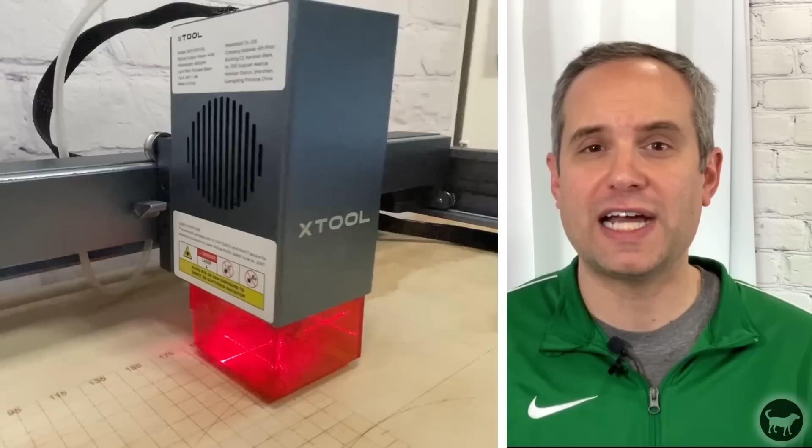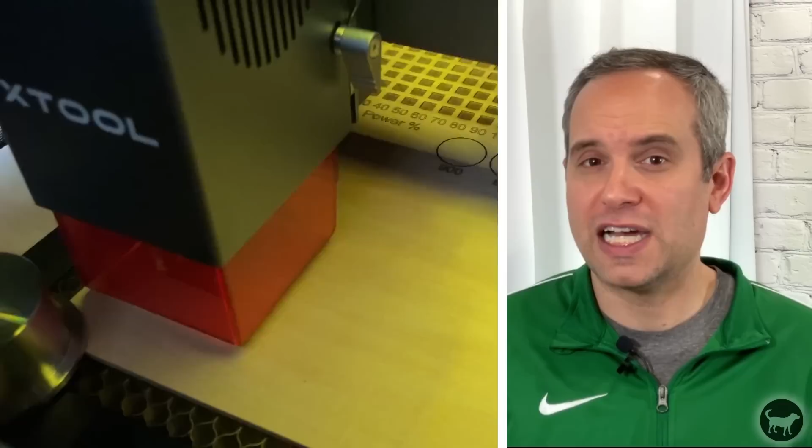Hello, my name is Ryan from Buster Beagle 3D, and today I'll be talking about the XTool 40W diode laser module. It is the newest laser by XTool that achieves the wattage of some of the entry-level CO2 machines. So is this diode laser the CO2 killer? Does it mean it is twice, 4 times, even 8 times better than the diode laser you may already have? Well, let's find out.

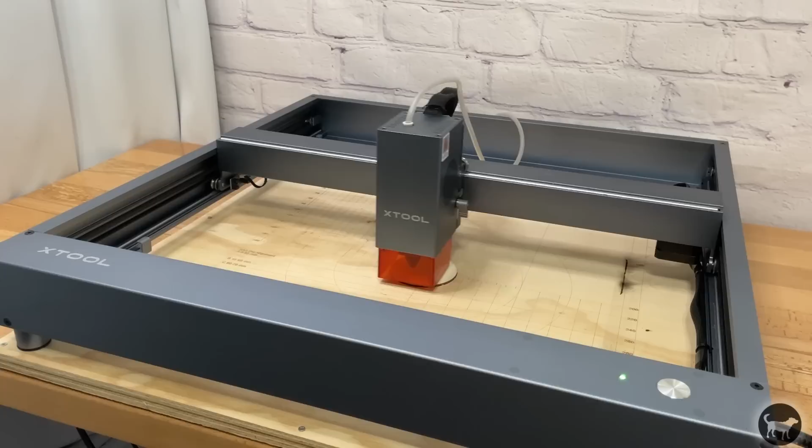So first, this 40-watt laser comes as a kit for installing on the current D1 Pro machines. If you already have a D1 Pro in any of the wattages 5, 10, 20 watt, you can use this kit to upgrade. This kit is only listed as compatible with the Pro version and not the original D1 machine. However, if you really wanted to, I'm not really 100% sure why you couldn't install this on the original D1 frame. The frames of the D1 and the D1 Pro seem to be identical,

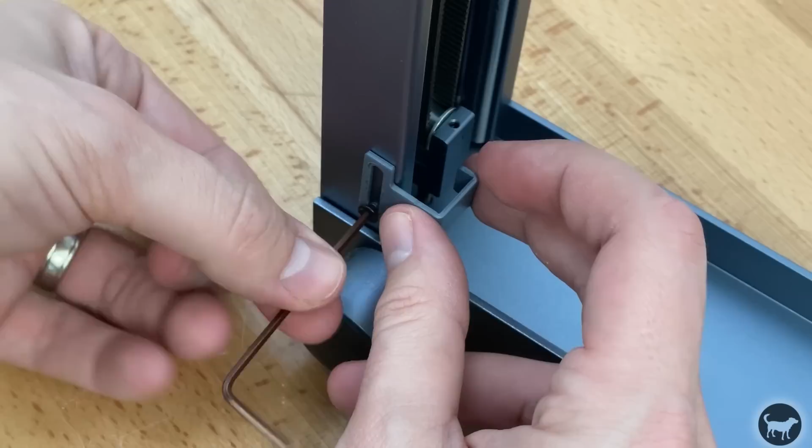minus the holes for installing the limit switch tabs. This kit comes with a complete gantry, new control board, a power adapter, and even new tabs for the limit switches that need to be installed, so I don't really see any reason why you couldn't technically run this laser without the limit switches, or figure out a way to install those yourself. One thing that I know would not work is that you would not be able to use your current original D1 laser module anymore, since the wire connection and mounting plate for the gantry is different. Again, this 40-watt upgrade is listed as only compatible with the D1 Pro, but I just thought I'd give you my observation.

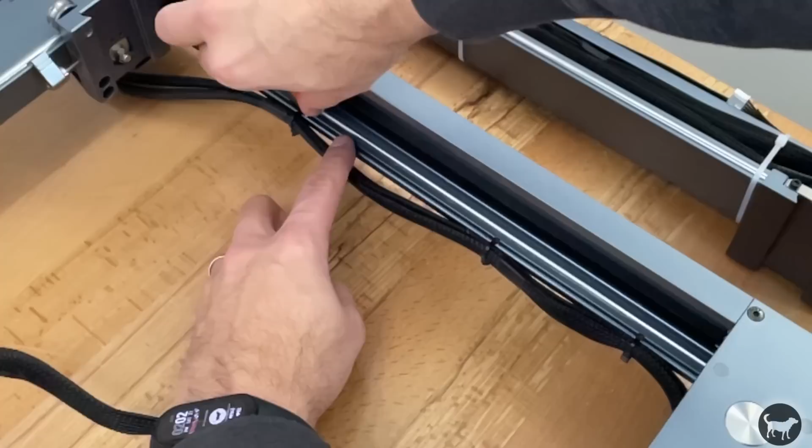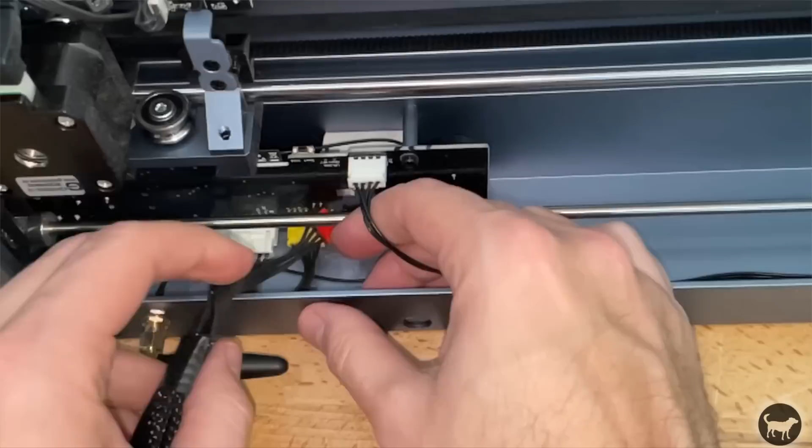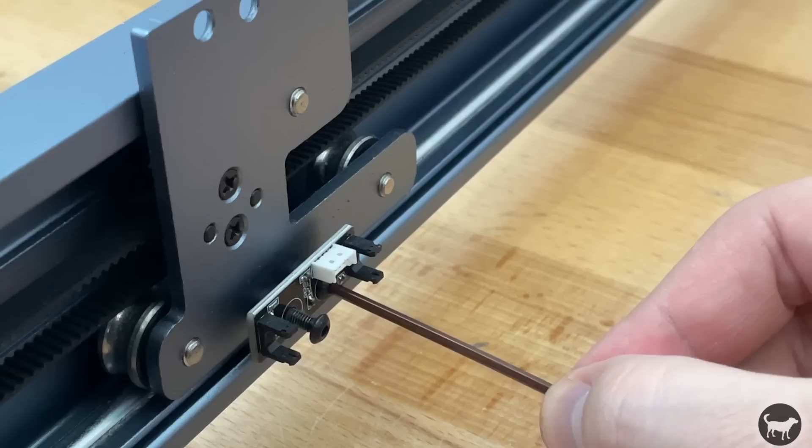So to install this kit, you need of course to remove your current module from your machine. The kit also comes with some nice wire clippers to cut off the current zip ties holding on the wire looms. You then unplug the wires from the control board and also unplug the wire from the gantry to the Y-axis limit sensor. You then remove the 5 screws holding on the X-axis gantry and then remove it. You then remove the Y-axis limit sensor and replace it with the one in the kit, which is slightly different and seems to be more robust than the original. You will also remove the tabs of the Y-axis that read the limit sensor and replace those as well with the tabs in the kit.

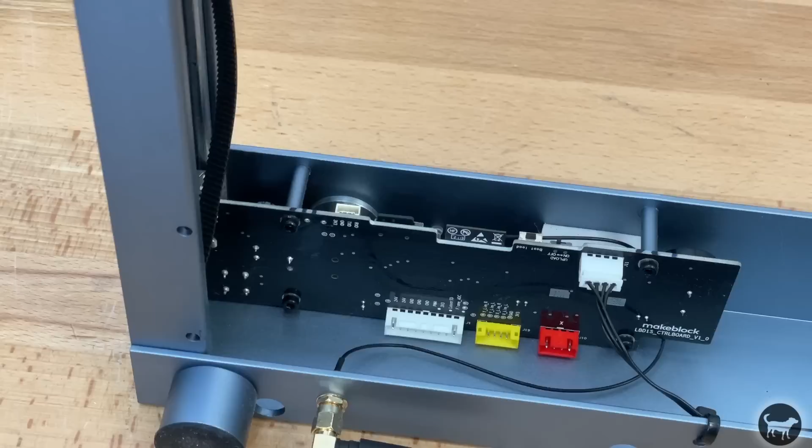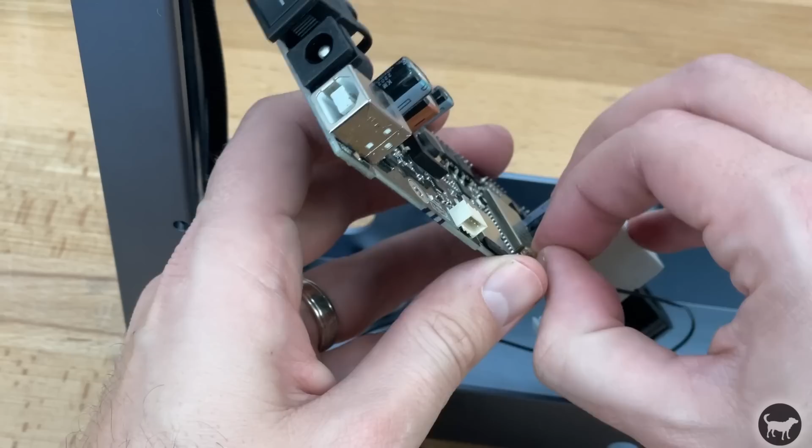You then remove the coupler that controls the Y-axis belt so you have access to the control board. You then remove the power connector and the 4 bolts connecting the board to the frame. Carefully remove the control board to expose the Wi-Fi connection that needs to be disconnected on the other side before the board can be removed. You then install the new control board the opposite way. Connect the Wi-Fi and screw the new board back in, installing the power connector.

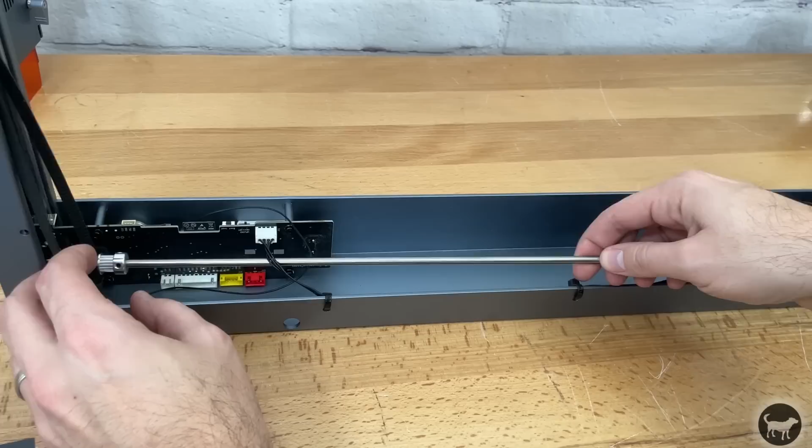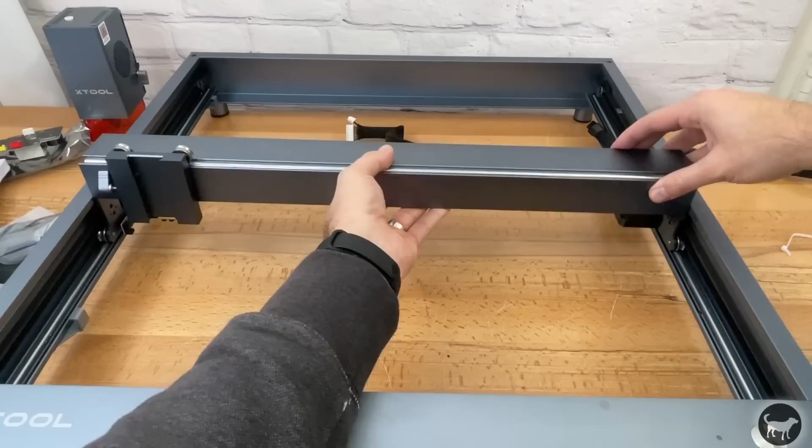You then reinstall the shaft and the coupler, making sure to slide the 2 gantry mounts to the front of the machine frame to make sure the X-axis will be square. If you needed to loosen up the belts to remove the shaft, make sure to readjust the tightness of the belts here before you tighten the coupler to make sure everything is square. Install the new gantry using 5 screws that you removed from before. The kit also comes with all of the hardware you would need to do this, but I just used the hardware that I took off. Be sure not to over-tighten the middle screw, as it's tightening your X-axis belt and you don't want it to be too tight or damage the axis.

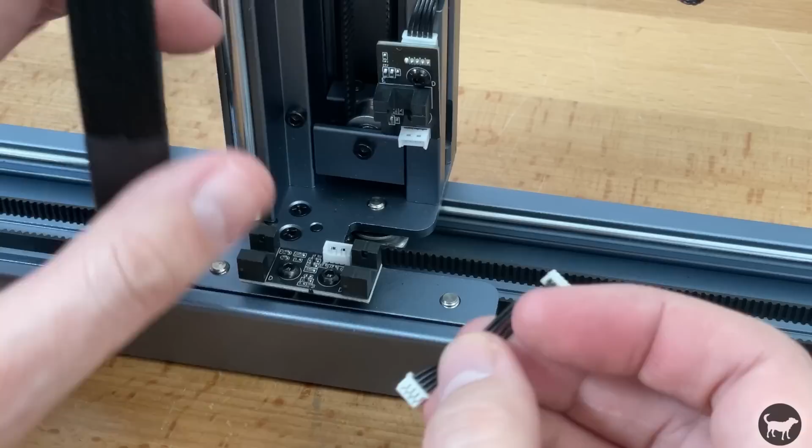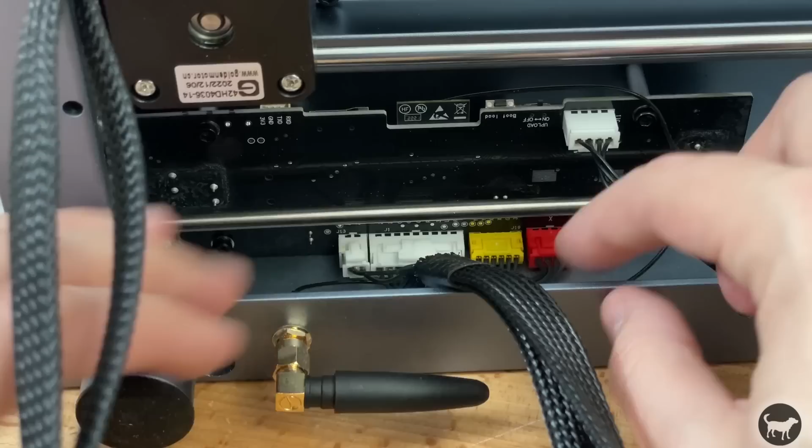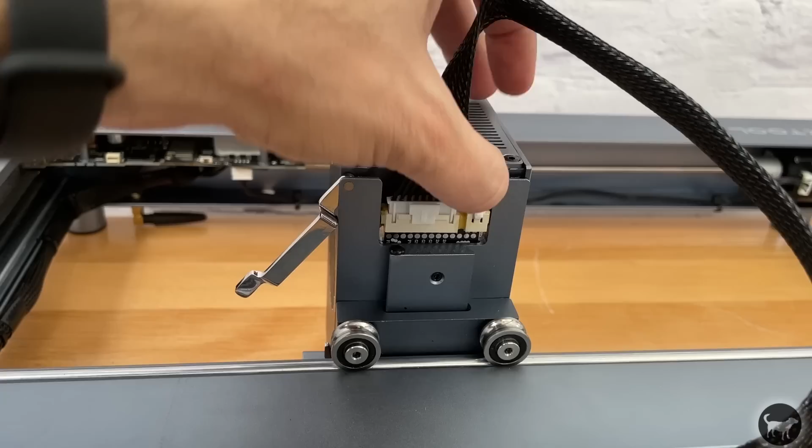Plug in the X-axis motor and the wire you had for the limit sensor off of the original machine. Then zip tie the wire loom to the frame and plug in the wires based on the colors. You can now install the laser module on the frame, flip up that metal tab that will hold the wires in place, and plug in the new wires. You can see it has the same connection as the Pro laser with an added connector, which I assume is for the additional cooling fan in the module. Flip the metal tab down and you are now ready to use your laser.

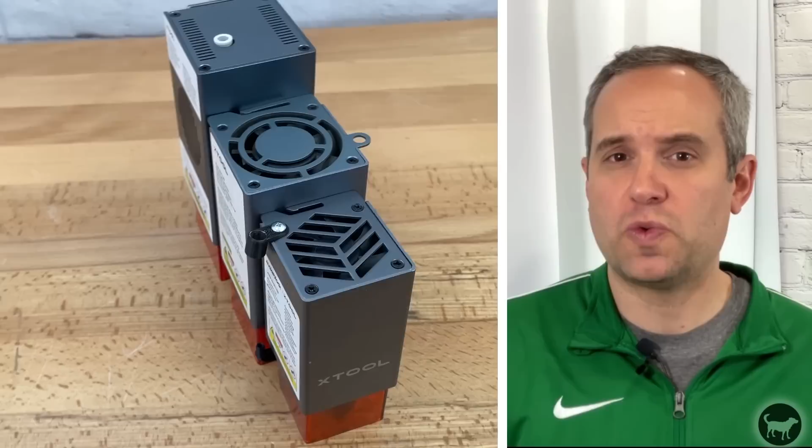So as you can see here, this module is quite a bit bigger than the 10 and 20 watt that you can see next to it. The 10 watt is 13 ounces or 362 grams. The 20 watt is 1 pound 10 ounces or 742 grams. And the new 40 watt is 1 pound 15 ounces or 892 grams. This extra weight is what makes the thicker gantry needed.

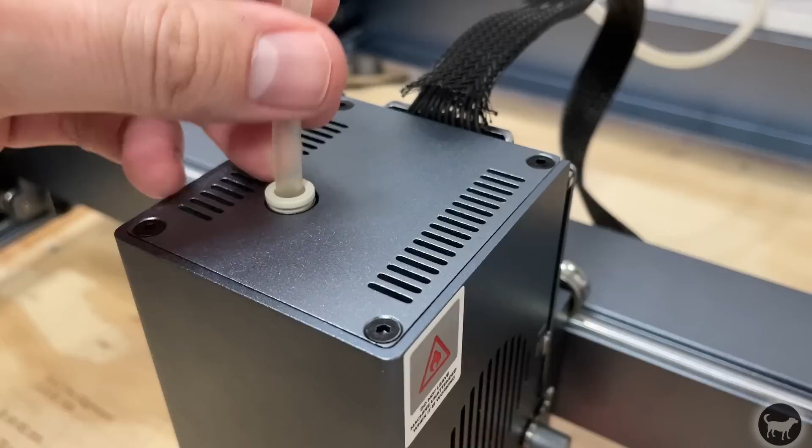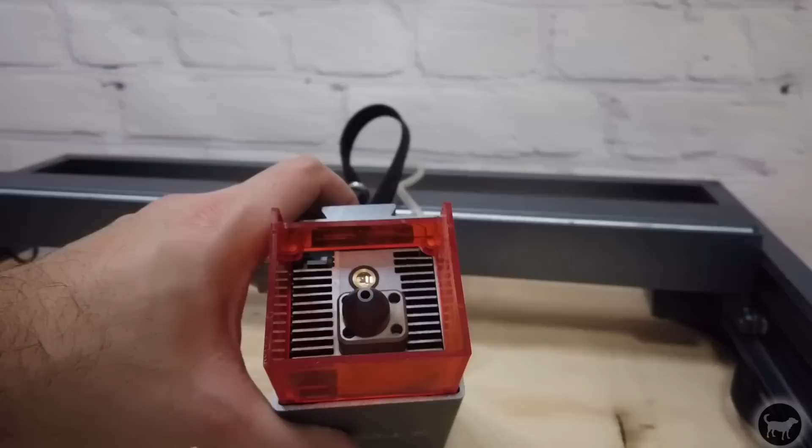The 40 watt comes with a new integrated air assist where the hose attaches to it through the top and the nozzle screws into the bottom. They moved the laser crosshairs to the rear of the laser instead of the side, and also the kit comes with 2 replacement lenses that you can use once your laser lens eventually wears out.

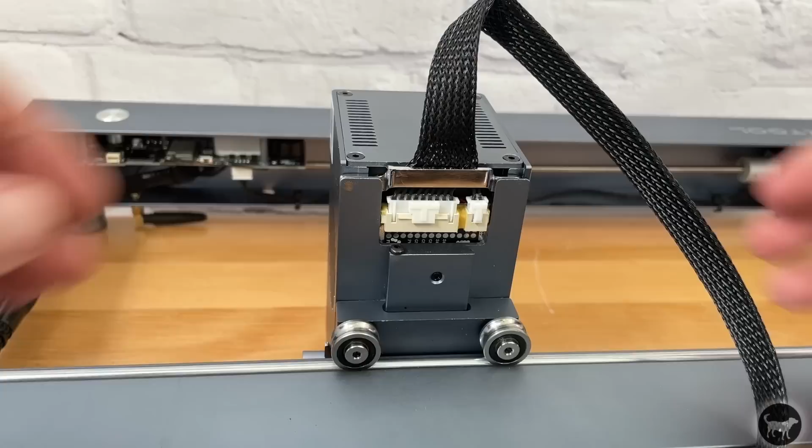They have also addressed the issue with the mounting of the wire connection to the back of the module with that nice metal tab that should hopefully help with the issue people were having where the mount on the back of the module could break the cables eventually with too much movement.

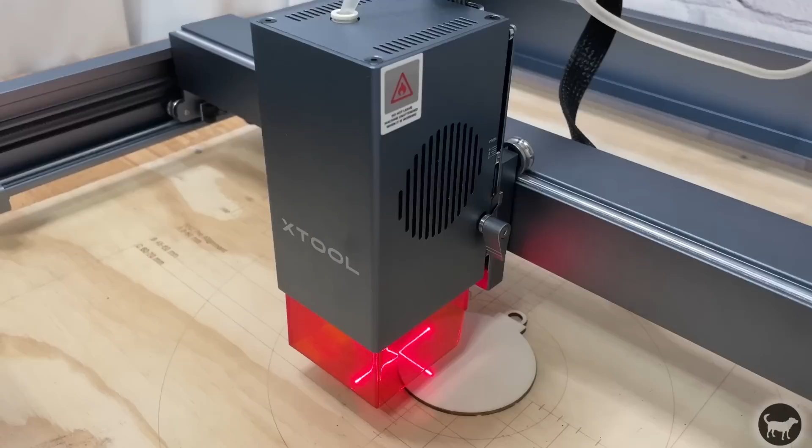The top fan has been replaced with 2 side fans that help to cool the module down. You still have the fixed focus finder switch on the side with the depth adjustment on the side as well to use while cutting. It also comes with a new shield that is magnetic to make removing the shield much easier. Alright, so now on to how it performs.

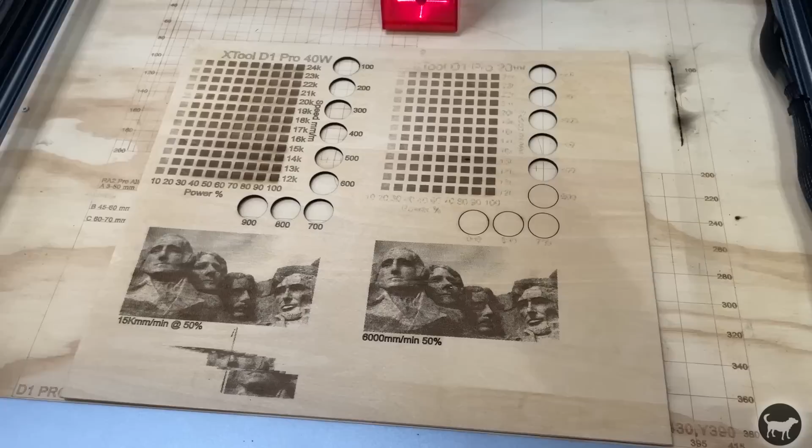I ran a test where I put the 20 watt and 40 watt head to head to see how it would perform. I ran a simple power speed test to see how they would compare. I also ran a cut test at various speeds to see how fast I could run the laser and still get through this 3mm basswood.

If you simply look at the power and speed test for engraving, you can see that the 40 watt laser is able to be seen all the way down to the 10% power mark, and what I thought was 24,000 millimeters a minute at 100% power seemed deeper in the wood than at 12,000 millimeters a minute at 100% power on that 20 watt.

Also, don't really pay attention to the fact that the text is very light on the 20 watt, as I had knocked the power down to 20% at 4,000 millimeters per minute when doing the 40 watt, which is just too low for the 20 watt to read properly.

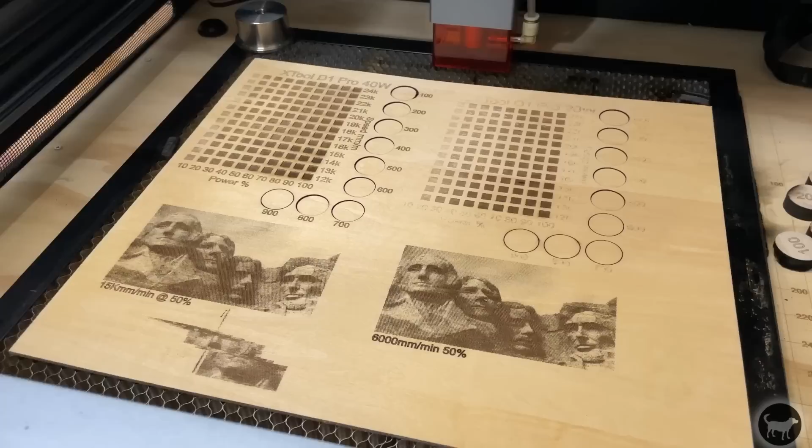You can also see here that the 40 watt laser could cut through this 3 millimeters of wood at up to 900 millimeters per minute, while the 20 watt topped out at about 500 millimeters per minute. I know it seems like I should have gone higher on the 40 watt, but that 900 millimeters per minute circle really needed to be popped out, so I don't think it would have gone much further.

The next test I wanted to run was to see the image that I would get with the 40 watt laser. I am not 100% sure about the laser spot size of this module since I have not seen it listed anywhere, but based on this test, I would assume it's fairly close to the size of the 20 watt. This was, however, where I ran into a curious issue.

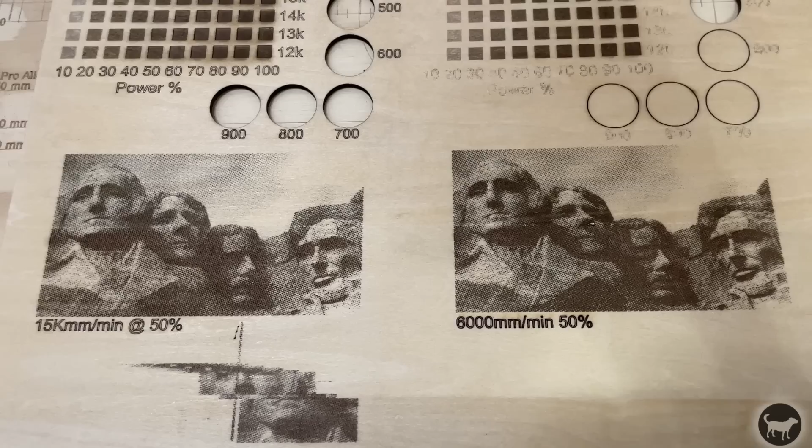When I went to set up this test for the image of Mount Rushmore, I accidentally set the laser scan angle at 90 degrees, which means the laser would burn the image vertically instead of horizontally like I normally do. Well, I set this image up for 15,000 millimeters per minute at 50% power, and it seemed to me to go significantly slower than that.

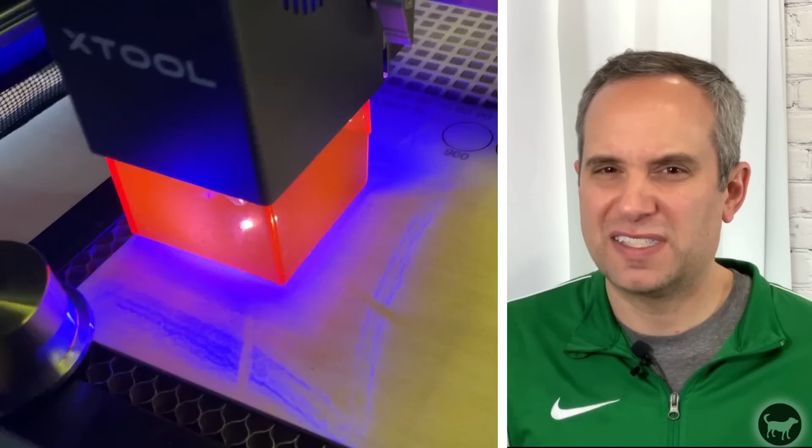After verifying my speed in LightBurn, I wondered if there was a setting in the GRBL machine settings that would explain why it seemed slower. Looking at the GRBL settings, I could see that the value of the $111 was at 6,000 millimeters per minute, which means that the full y-axis or back to front speed you can achieve is 6,000 millimeters or 100 millimeters per second. That means that instead of the 15,000 millimeters a minute, I was burning it at 6,000 millimeters per minute.

The more curious value here to me, however, was the x-axis or left to right speed. That speed is listed here at 18,000 millimeters per minute and not the 24,000 millimeters per minute I was burning my test at. That means that there is no difference between the 24,000 millimeter a minute test and the 18,000 millimeter a minute test. Now, why did I even bother to test at that speed?

It's because the D1 Pro is advertised at 400 millimeters per second, which is 24,000 millimeters a minute. However, based on the firmware and GRBL settings, the fastest this machine is allowed to go is 18,000 millimeters a minute or 300 millimeters a second. Not that you ever really want to work at that speed in the first place, which I'll talk about in a little bit, but this is also not a changeable value to the user.

You see, and I have talked about this before, the D1 and the D1 Pro machines are not open source, meaning that you are not free to go in and alter any of the settings that you want on the machine. This also means that the settings that I just talked about are hard-coded in the firmware and not able to be altered by the user. So even if I wanted to change that setting to 24,000 millimeters a minute, it would not write to the machine. I can't change any of those settings and have them stick.

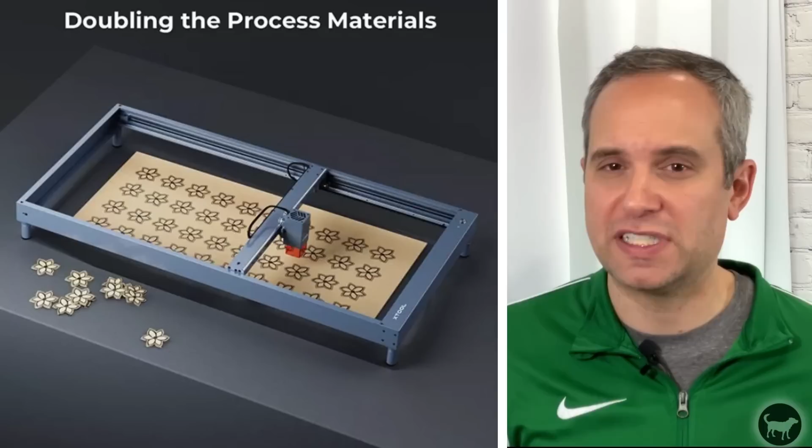If xTool is watching, and I know this is a bit of a tangent and I'll get back to the 40 watt in a second, they either need to change or make some of these settings usable to the user, specifically the Y max travel that is set at 406 millimeters. That means that if you had purchased one of their extension rails, you would have to press the home button potentially more than one time to get the laser to the back left corner if it was starting more than 406 millimeters forward of that spot.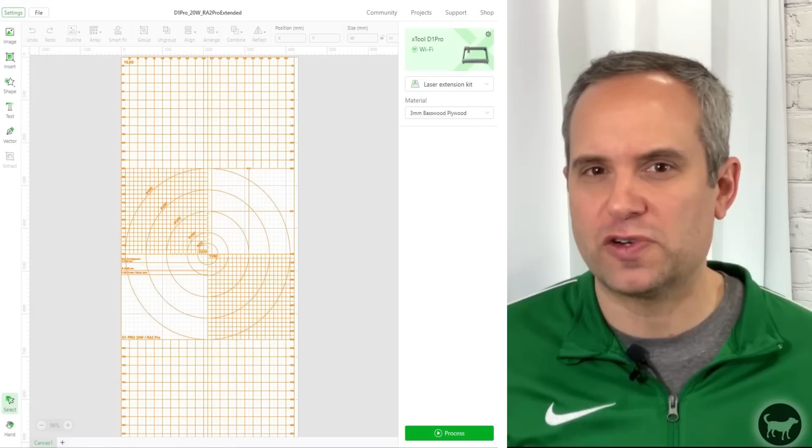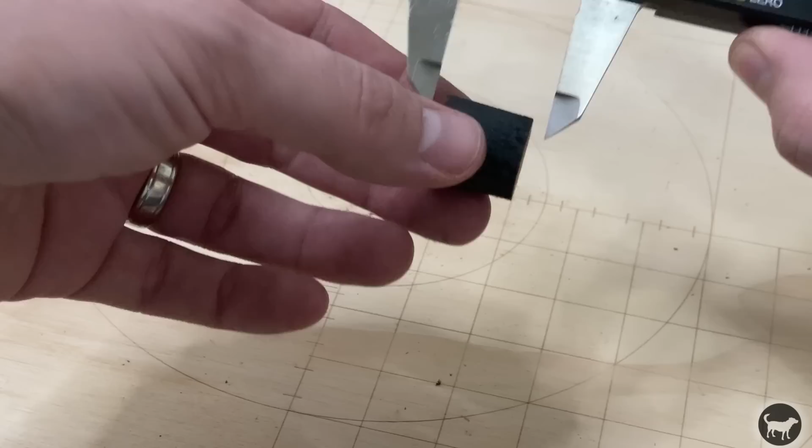Okay, so back to the 40 watt. So in general, engraving and cutting tests for the 40 watt perform well, but I also wanted to see how it would work on some thicker wood. I had some of this scrap pine tree ring left, and I was able to cut completely through 19 millimeters at 100 millimeters per minute in one pass. That is 3/4 of an inch in one pass. Now again, this is not plywood, which would have a much harder time at even half of that depth due to the density and layers of wood and glue and fillers, but it's still pretty impressive.

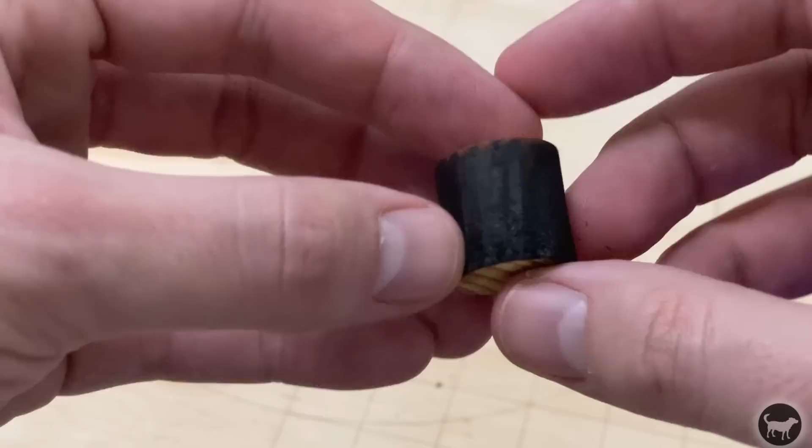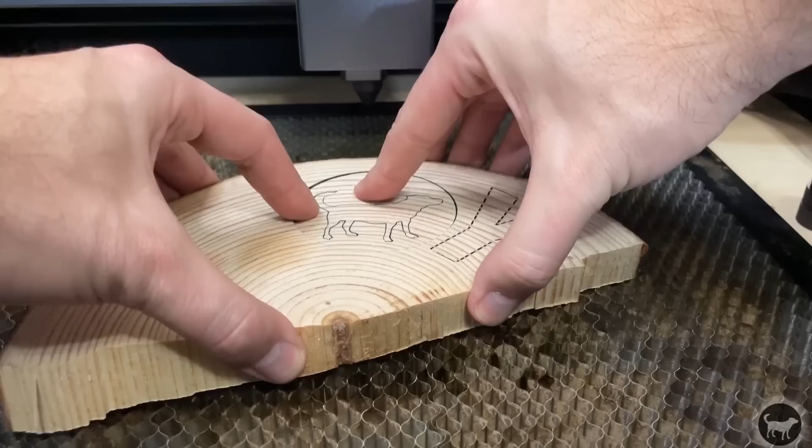Now that is impressive, but it comes with a bit of a caveat. It really depends not only on what material you are cutting, but also on what design you are cutting. At those speeds and power, you are much more likely to burn or set fire to the wood you are working with. I decided to cut my logo out of that wood, and you can see from the back here that the smaller detail areas kept the laser in the same place for too long, and it ended up burning the wood underneath. It would cut through, but you also don't want to burn what it is you're trying to cut. So now back to plywood.

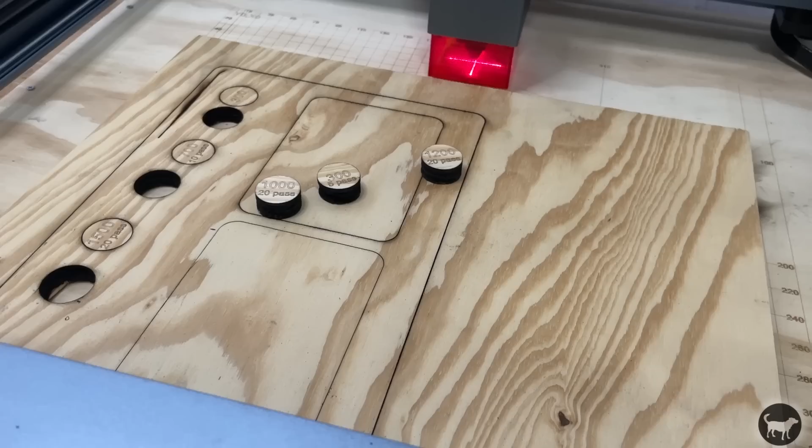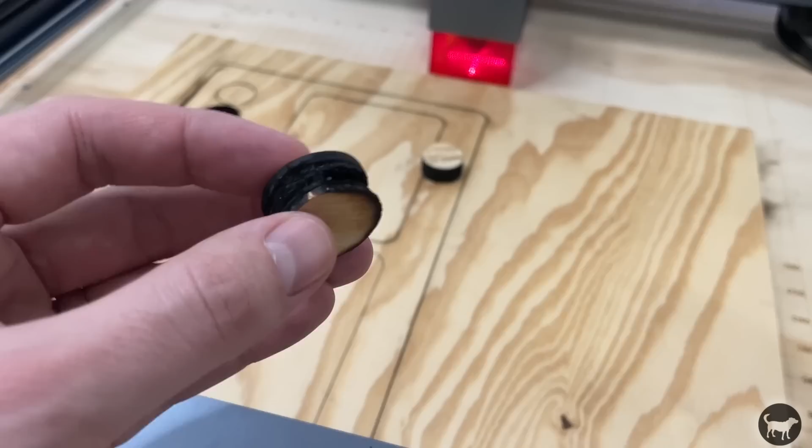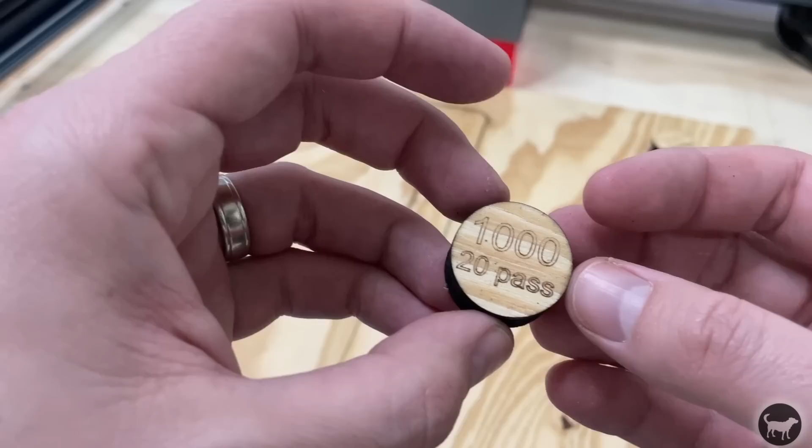I was trying to cut this 1/2-inch plywood, and I knew at 100 millimeters per minute I would just end up igniting the wood, so I ran the test again at 300 millimeters per minute with 5 passes, and even then, while it did cut through, it ended up igniting the wood deeper down. I tried 700 millimeters a minute with 10 passes, and it almost worked, but not quite. Then I did 1,000 millimeters per minute at 20 passes, and that worked, but again, this is plywood, which is hard to gauge, and in most cases, you still got a decent amount of charring on the side of the wood.

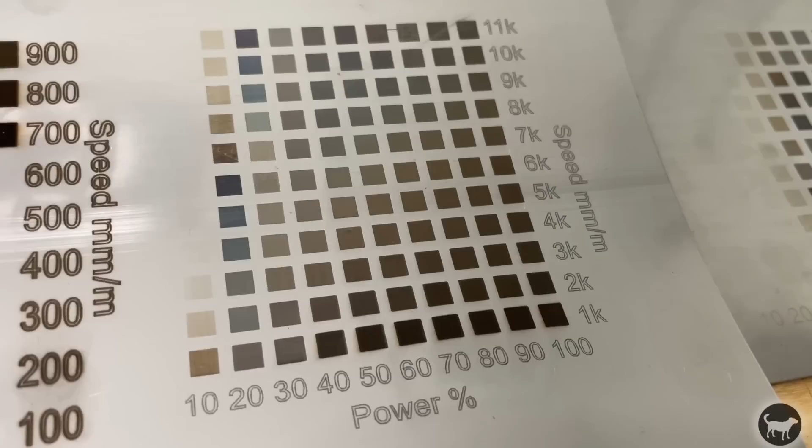The last test that I ran this laser through was color on stainless steel. I ran another power speed test from 1,000 millimeters a minute all the way up to 11,000 millimeters per minute, and I got a bunch of colors. You can see here compared to the 20 watt laser that I can get even more colors at a lower power, which is really cool to see and should lead to some interesting designs. Do keep in mind that this can generate a lot of heat and could warp the metal, so you do need to figure out a way to deal with that issue.

This laser is also advertised to be able to cut 0.1 millimeters of stainless steel. Now that is roughly the thickness of a piece of paper, and I'm not really sure why you would want to do that, but you can. I would watch out again for warping, and I'm just not sure it's something that I would be doing with this laser.

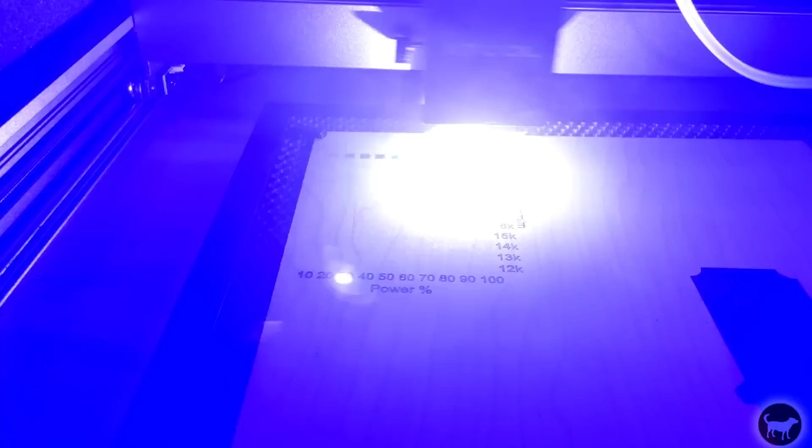The last thing I wanted to talk about before I go into the overall thoughts on this laser was to go back to that speed. Now, while engraving at 6,000 millimeters per minute looks great, that little test area under it was at a true 18,000 millimeters a minute. The issue here is that the laser at those speeds can have a hard time switching directions, especially at the weight of the 40 watt laser module. While the laser is much more powerful, that also comes with the cost of that weight.

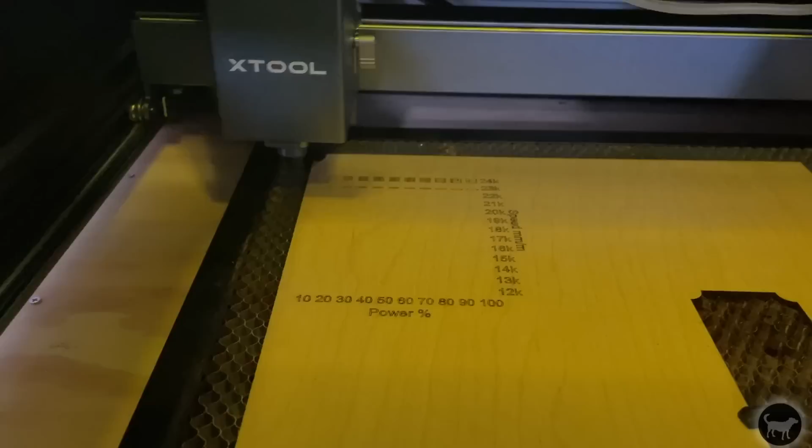This 40 watt laser is just shy of 2 pounds, and I have some 10 watt laser modules that are less than half a pound. That means that this laser is 4 times as heavy as my other 10 watts. Both the 10 and 40 watt lasers are using the same belt, the same stepper motors, so you can imagine it's harder to travel at a high speed with that greater weight, stop, and then travel in the opposite direction with that weight. I think that is why you get some of that layer shifting that you can see extreme here, but also in places like this where it's more subtle but still there.

This was a test I ran through Wi-Fi to make sure it wasn't my connection to my computer that was causing the issue. This was at 15,000 millimeters a minute and eventually lost track in a couple different spots. Also, since I have no control over the GRBL settings, I can't even try tweaking the acceleration settings or anything like that to try to fine-tune those settings to see if I can adjust it a little bit better.

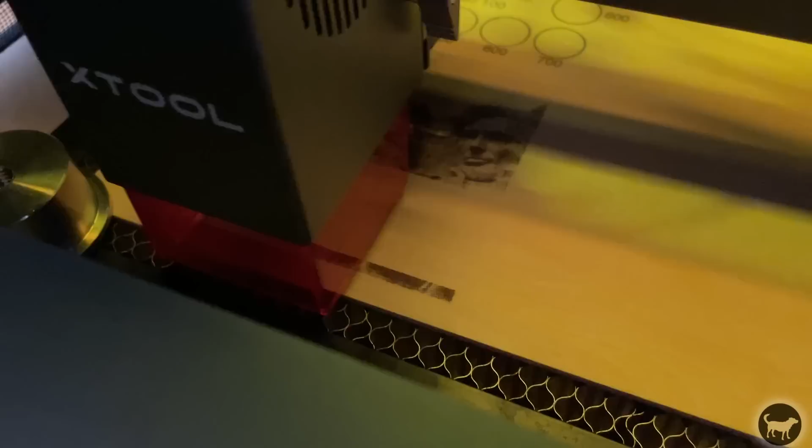I guess what I'm trying to say is that even though you have more power, it doesn't mean you can go faster given the weight in all circumstances. So this is a good time to talk a little bit about the differences between this machine and a 40-watt CO2 laser machine. Both have the same wattage, but that doesn't make them equal.

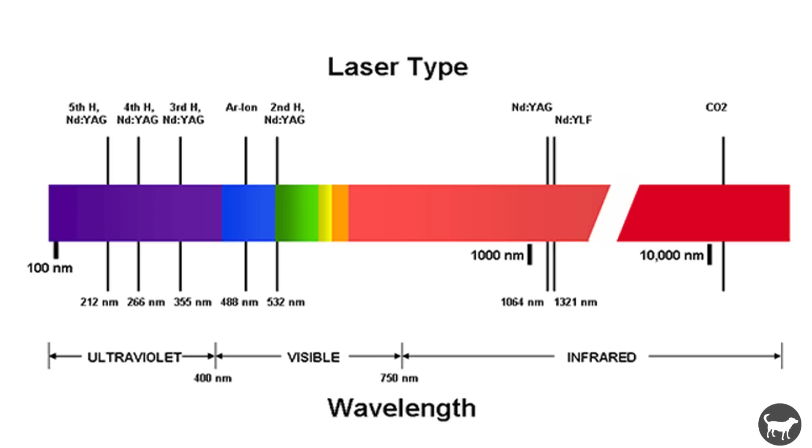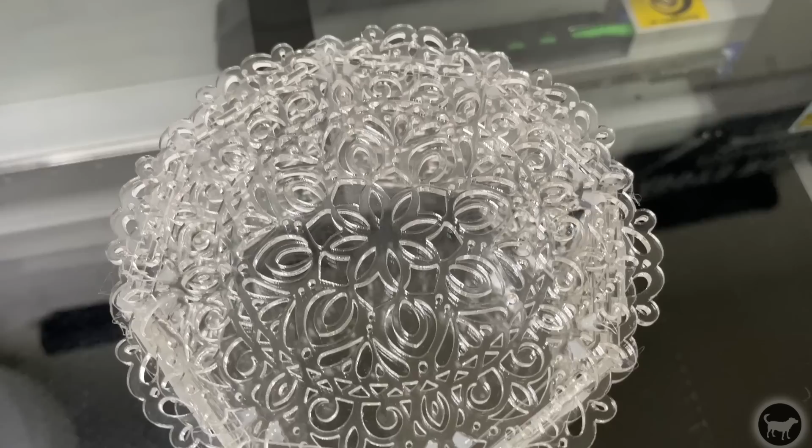A diode laser runs at a different wavelength than a CO2 machine, which can produce an invisible infrared light, which means it can cut different materials that a diode laser cannot, no matter how powerful it is. This means that a CO2 can cut things like clear acrylics that a diode laser would never be able to. The other thing is that the laser head of a CO2 is just a reflecting mirror with a lens, so there's no extra weight on the gantry, which allows it to move very fast.

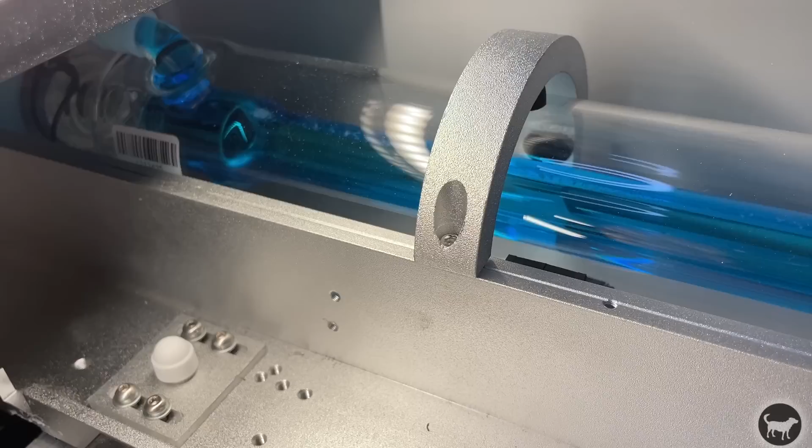However, there are some downsides to a CO2 machine, namely that the laser tube that generates the beam is large and the machine can be very large and enclosed. You also have to have some sort of water or coolant system in these lasers to keep the laser tube cool, which also just makes everything bigger. It's definitely not as portable and lightweight as a diode laser is. CO2 lasers are great if you have the space and can deal with the sometimes smaller workable area, but it really doesn't have the flexibility of a diode laser.

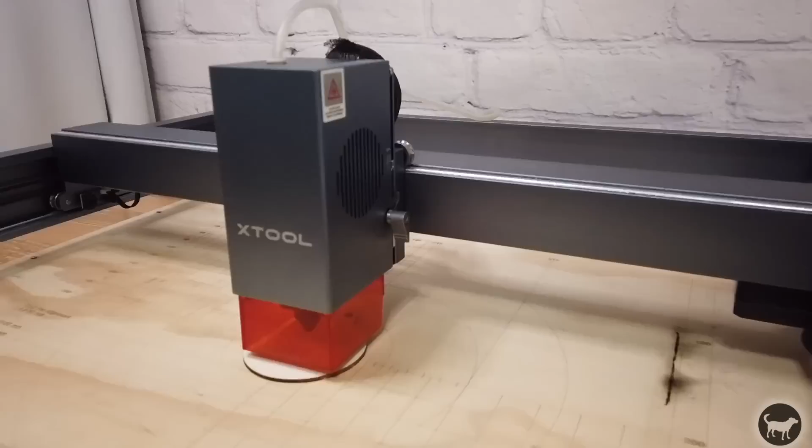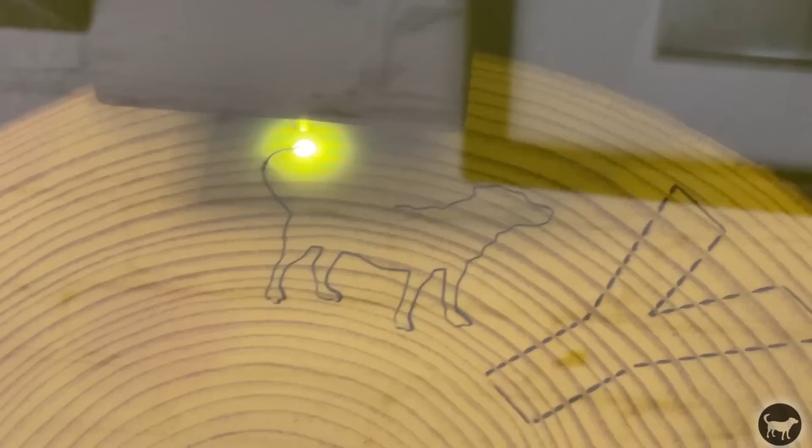Okay, so who is this 40-watt laser for, and should you get it? Well, I think that really depends on the individual and their needs. If you want the best fast cutting ability, then you go with the 40-watt. However, I'm not talking about plywoods here. I think that any laser really just isn't the right tool for thicker plywoods. If you have a solid wood like my tree trunk, it does a pretty good job, but you still might end up with some charring on the sides and the bottom.

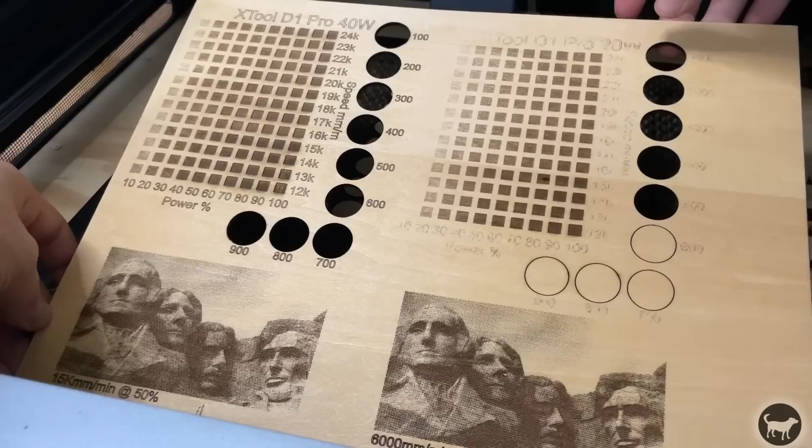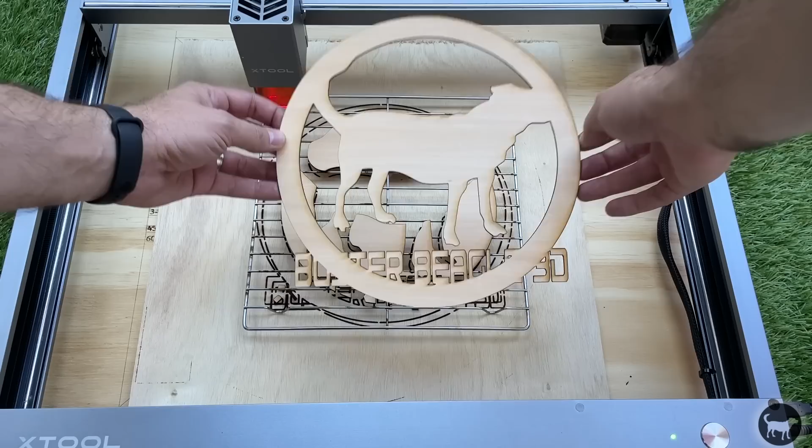Where I think this 40-watt really shines is both on the colorability on metals as well as the ability to cut thinner woods at those faster speeds. If you're someone who is going to cut lots of 2 to 3 millimeter wood for little projects and would rather cut at 900 millimeters a minute instead of a 10-watt laser at around 100 to 200 millimeters a minute, then this is the one for you. For the 20-watt laser, I would almost say pretty much the same thing, but at about half the cutting power. With both the 20-watt and 40-watt, you are still going to be able to engrave nicely as well.

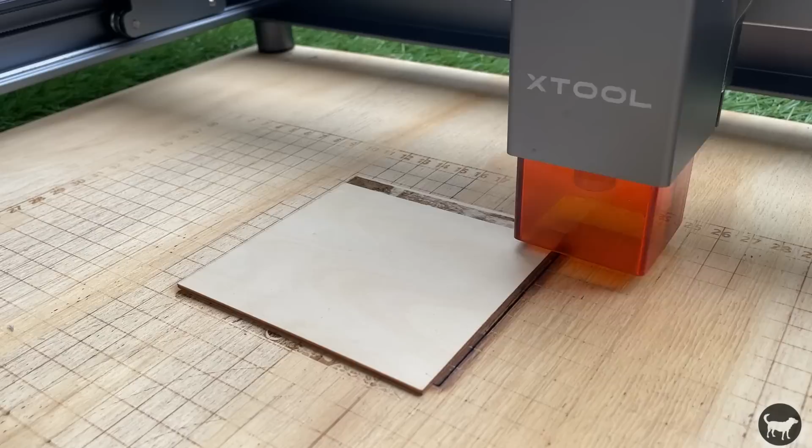Now, when you start to go lower to the 10-watt, you still have the ability to cut thinner woods, but you also start to lower the spot size and overall weight of the laser, which means you could potentially run it faster without running into issues. The lower spot size also increases the resolution, as you can fill up an inch with more lines, increasing the image quality. This goes even further with the 5-watt laser that can cut some thinner woods with enough passes, but the spot size gets smaller, which means the resolution can go up, meaning I can get a far more detailed image with a 5-watt laser than I can with a 40-watt laser.

This is also why the company recommends getting a 5-watt Pro plus the 40-watt kit if you don't already have a D1 Pro, so you have somewhat the best of both worlds. Again, at the time of this review, the 40-watt laser is not sold as a standalone machine, but a kit for upgrading the Pro lineup.